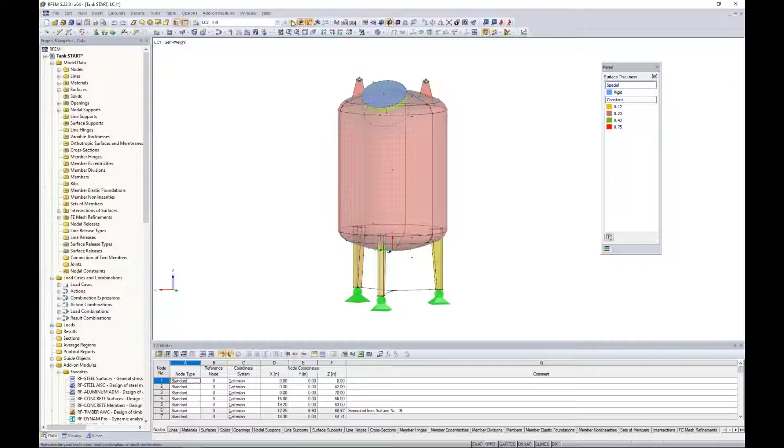We also had applied the loads to the structure, and we can see that within our drop-down box here are our different load cases. We have self-weight, which I don't have any visible loads displayed here because I didn't apply anything to the dead load other than accounting for the self-weight. Load case 2 here is the fill load, and this fill load was just an interior surface load within the inside of the tank.

We also have a wind load, so we can see the windward direction here from the global x-axis. We have a suction force on the leeward side. We also have a compression force coming up from underneath the tank, and we have a tension force up at the top here. Now we also put together all of our load combinations per the ASCE 7.

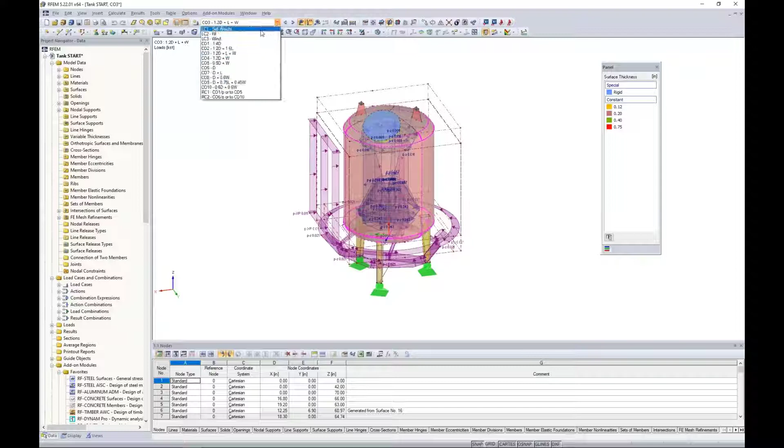So as we scroll through these, we can see all 3 of those different load cases acting together on the structure. So starting where we ended from webinar 1, we'd want to run a calculation, and we can go to calculate all. And for the sake of time, I've already went ahead and done so. So what we would be presented once we run the calculation is our results.

Within the project navigator, we should now have this 4th tab available to us called results. I think it's helpful if we just collapse most of these trees here, just to slowly go through all of the visible options, and we'll start off with the global deformations.

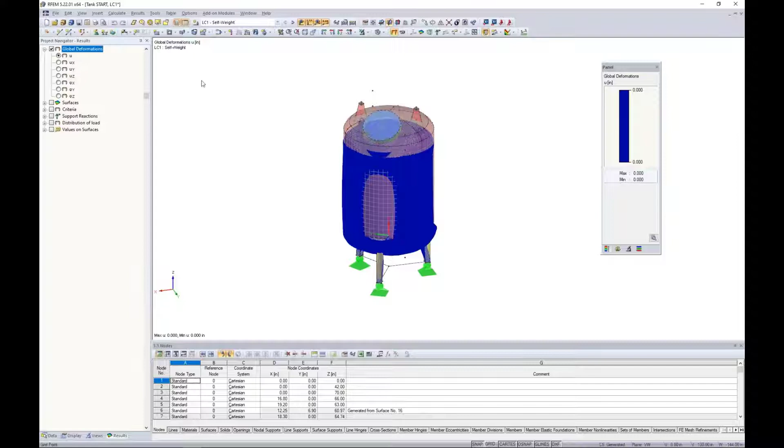So as I'm scrolling through these different load cases and load combinations, and I can go ahead and turn off my loads as well, I'll see the general deflection of the structure. This might be helpful in understanding the behavior under the applied loads. If we see something kind of flying off the page here, then we would understand that maybe we didn't correctly model something, or maybe our loads were incorrectly applied. So it just gives us a sense here if everything is going well.

What else might be important is to jump back to my fill load. Remember from webinar 1, when I double click on this fill load, we have it increasing linear in the Z direction. At the top of the tank, I want this fill load to be 0, but as we slowly increase the depth, we eventually reach a magnitude of 0.4 kips per square foot, which makes sense since the bottom of the tank sees a higher fill load than the top.

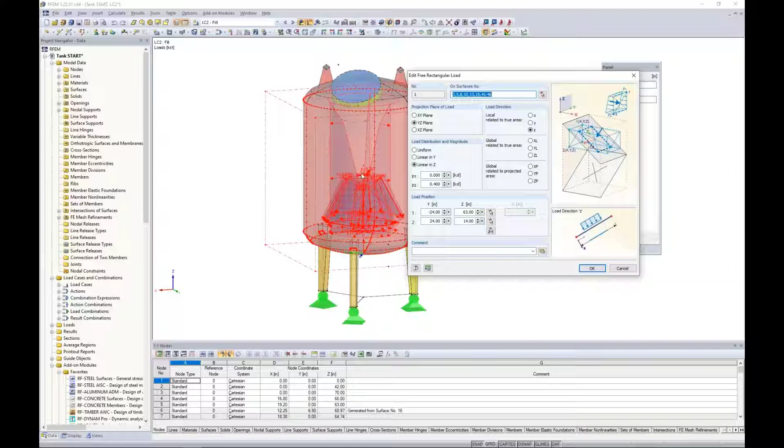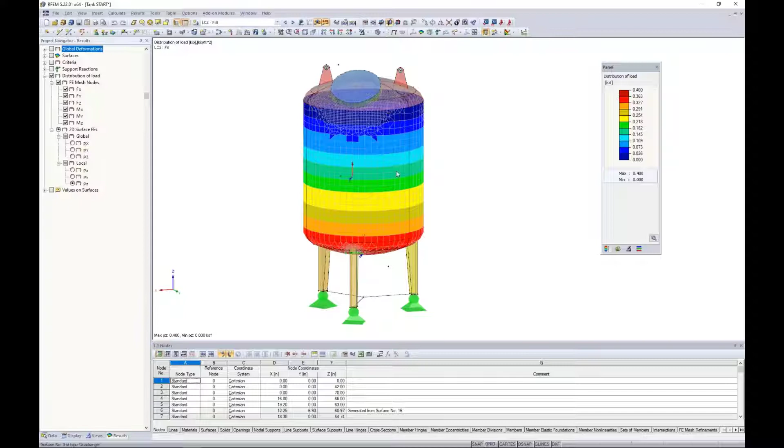So with this particular load case, after running results, I can turn off the global deformations and instead take a look at the distribution of load. When I view the distribution of load in the local Z direction, we can see how this load was distributed on the FE elements.

At the top, we have this blue color, indicating 0 kips per square foot, which is exactly what I defined with that surface load. But at the bottom of the structure, we have red contours equal to 0.4 kips per square foot. So just a nice validation that we correctly applied that fill load.

In a similar sense, we can take a look at the wind load. If I display this load again, we have it acting in the global X direction. Looking at the distribution of the load with these contours, I should see my highest compression force on this windward side, which relates to the negative value here. And in the back, we have this suction or tension force, denoted by this yellow positive value at about 0.01 kips per square foot.

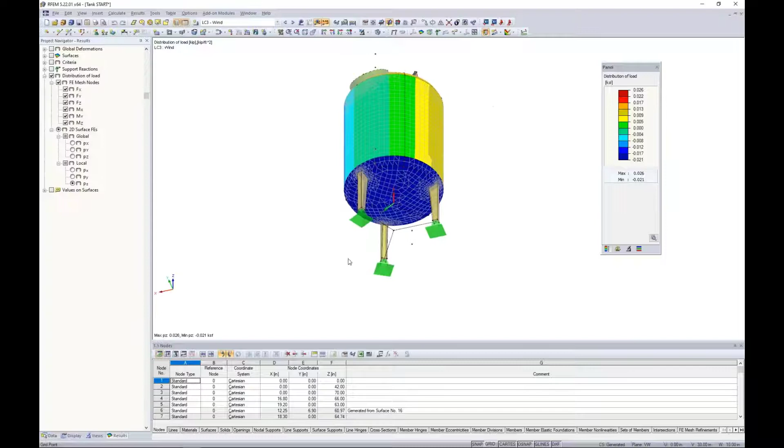At the sides, I should see essentially 0 because the wind is passing right over each of the side surfaces, denoted by the green color. At the bottom, this shows the correct compression forces, and at the top we have suction forces denoted by red with a positive 0.026. So again, just a nice validation to ensure we've applied our loads correctly.

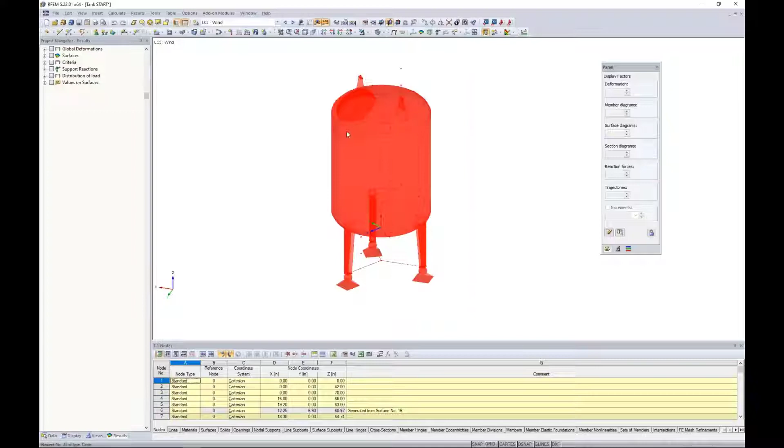We can also take a look at the entire structure by selecting it with my selection box. I can right click and view the center of gravity and info. The program throws up a warning that some elements have 0 density and won't be included in the center of gravity. We know this because in webinar 1 we created different intersections with our surfaces and deactivated components, and we also have our rigid component for the top of the manhole that we wouldn't necessarily want to consider for density.

But this will give us the information of the center of gravity, and we can also create a new node. It's difficult to see, but there's a red arrow pointing to the center of gravity. More importantly, we can get information such as the surface area and the coating of the surfaces.

Why would the coating be important? Well, if we wanted to layer some type of coating on this tank structure, or paint, we actually have the area in inches squared of how much paint might be required. We have the volume of the material as well as the weight of the material, so just a general summary of all the surfaces we've modeled.

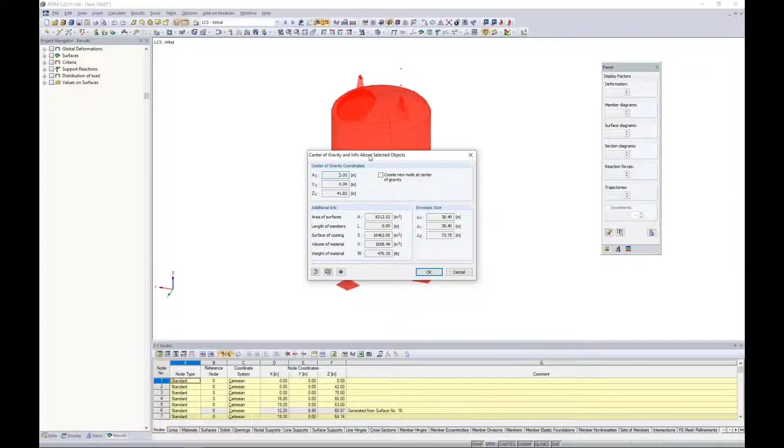In a similar sense, I can take a look at my tables, jumping to my results in table 4, where I can view my results summary. What might be interesting is to jump down to load case 2, our fill load again. We can view the sum of the loads in the Z direction, and you can see it's set at negative 3.03 kips. This is the total load from that interior fill load I applied.

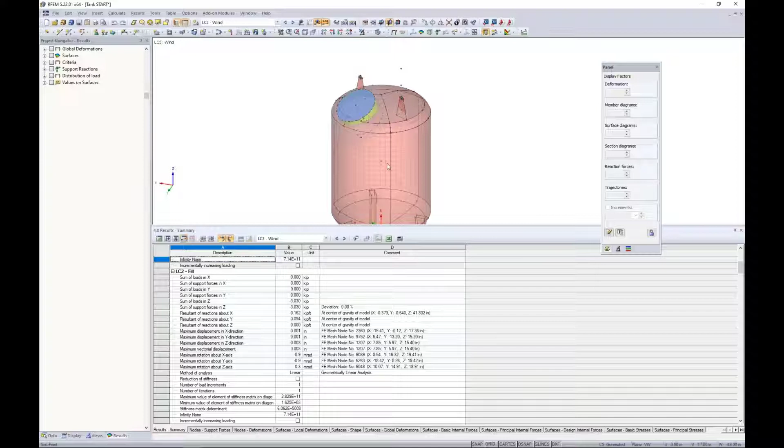We would expect our support reactions to match this sum of loads. So when I activate the support reactions in my project navigator, I turn on the global, making sure I'm under the fill load. We turn on the global Z components, and sure enough, we have 3 reactions in the vertical Z direction at 1.01, which add up to the sum of loads for LC2, the fill load, at negative 3.03. So again, just checking here that everything matches up quite well.

Now we can really move on to the results of our surfaces. With this, I can expand my tree here for my surfaces, and maybe we jump to one of these different load combinations here to view our results.

Now, what we have visible to us here is local deformations. These are based on the lowercase x, y, and z axes, related to the individual axes here of each surface rather than our global axes.

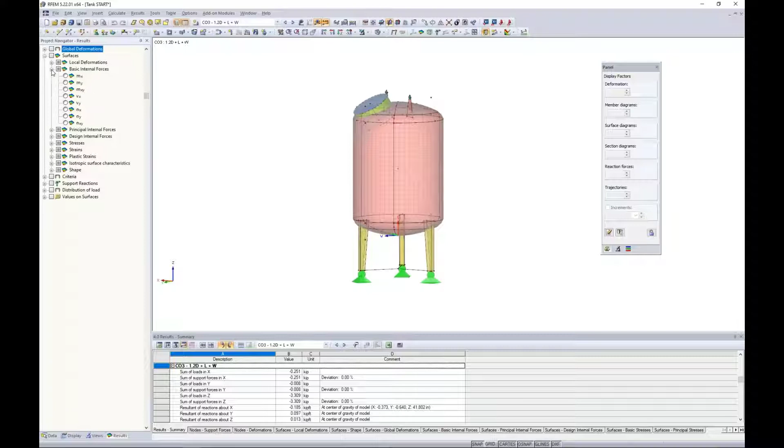But we can also view the basic internal forces. What I'll do here is activate a single surface and change the visibility by the selected objects, and zoom in. Let me also right click to turn on the local axes of this surface element. So we're currently viewing the bending MX. We also have MY. We can view the shear forces as well as the axial forces, NX, NY, and NXY.

One thing to note here that is unique for surfaces is that MX is not bending about the local axes, it's along the local axes. This is contrary to our belief for 1D members that MX would be bending about the local x-axis. So surfaces or plate elements have a different convention here.

One thing that I think is helpful to understand how these internal forces are calculated, or the convention related to these local axes, is under the help manual. We can take a look at the manual in PDF format for RFEM, or we can also access the online manual on our website. If you go to dlubal.com, you'll also find under downloads and info, online manuals. I'm currently looking at the RFEM online manual, chapter 8 for results.

If we scroll down here to section 8.15 for basic internal forces, the reason why I wanted to point this out is because it shows a nice picture here of the internal forces in relationship to the local X, Y, and Z axes. Again, we can see something like MX is bending along the X axes, MY is bending along the Y axes. We also see these axial forces, shear forces all shown here. So this just gives us a little bit better view of how exactly those forces relate to the local axes.

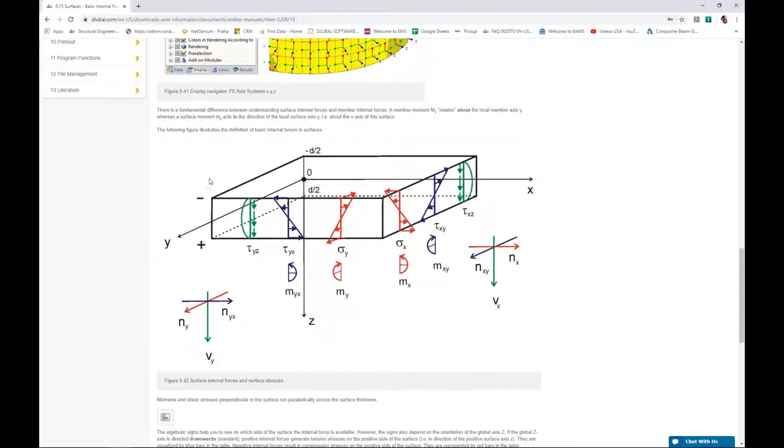Now keep in mind too that for all of these internal forces, this is true for stresses as well. The equations are directly within the help manual, so if we're curious to know exactly how these internal forces are calculated, again, refer to the manual.

So going back to RFEM then, that will essentially sum up the internal forces. But you'll notice that the next option, if I expand the tree here, is principal internal forces. This is showing me M1, M2, we have N1 and N2. So what exactly is the difference here between the basic internal forces versus the principal internal forces? The basic is really internal forces relative to the freely defined X, Y, and Z local axes, as we already discussed.

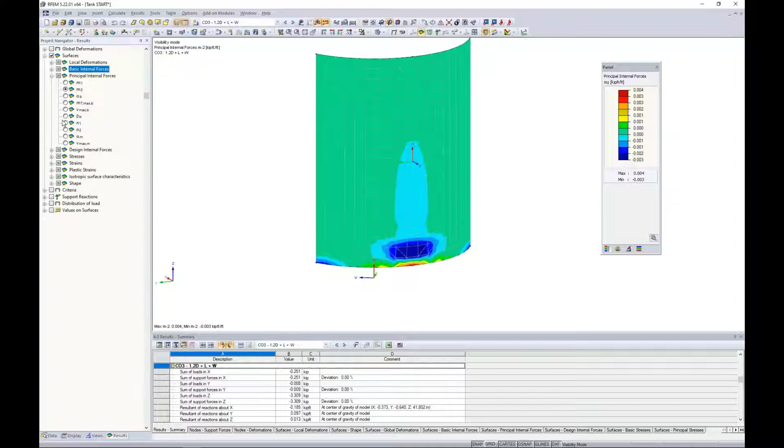Well, for the principal, we will represent the extreme values of the internal forces. Essentially, we'll take the basic internal forces that we just saw and transform them in the principal axis direction. So principal axis 1 will be the maximum value, which we can see here as M1. Then we have axis 2, which is the minimum value. We also can display this alpha factor here, and the alpha is going to be the angle between the local x or the y axes and the principal axes 1 or 2. And we need to increase the trajectory factor here.

So I do so quite a bit, and then we can see down at the bottom, those trajectories are visible to us. Again, that's going to give us the angle between our local x-axis and our principal axes. Now, in some scenarios with a completely straight, flat surface, maybe there is no difference between basic internal forces and principal.

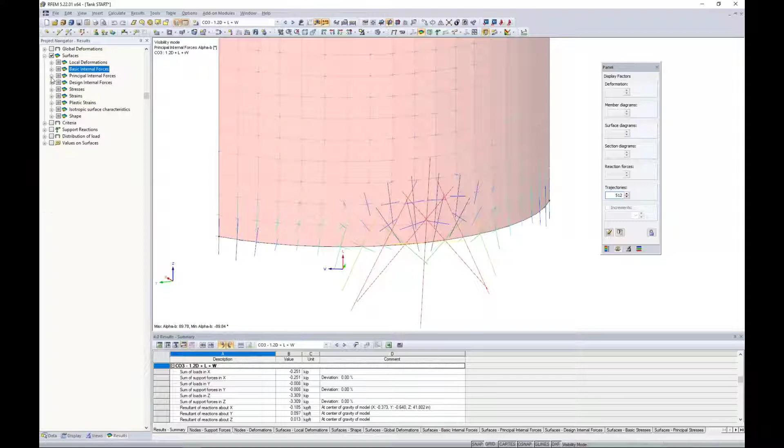Looking at the design internal forces, this is really more relevant to concrete design. We're going to give you the positive and negative bending internal forces for the top of the surface versus the bottom of the surface. So you can imagine how that's beneficial for concrete design. This might be used if we weren't utilizing the add-on module within RFEM, but rather we wanted to take these internal forces into our own in-house tools or spreadsheets to do design. Now, today we have steel surfaces, so this really isn't of much interest to us.

Now we have the stresses listed here. These are only available within RFEM when you've purchased the RF Steel add-on module. RF Steel, which we'll get into in a minute, releases these stresses within the main program. So if you did not purchase that add-on module, you would not see the stresses available here. This is true for all materials, even timber stresses, for example. You would need to purchase the RF Steel add-on module, which sounds a little counterintuitive, but essentially that's what releases these stresses we're currently viewing.

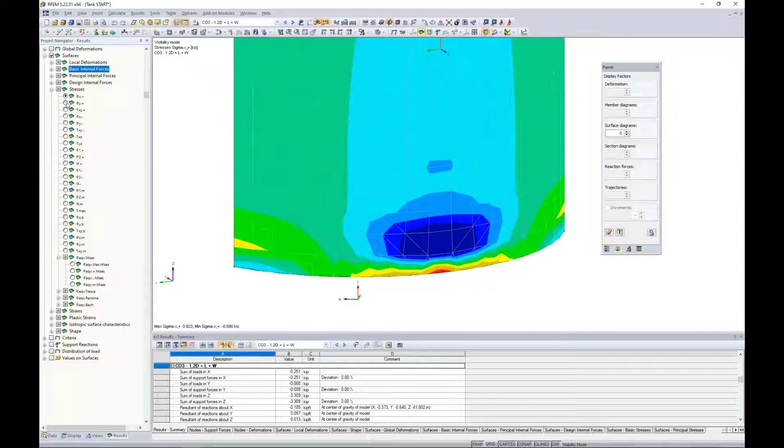So we can view the normal stresses in the X and Y direction, shear stresses, but we also have the principal normal stresses and principal shear stresses as well, based on those principal axes we just discussed.

A little further down, you can see our equivalent stresses, and these are based on 4 different hypotheses. So you can see here we have von Mises, Tresca, Rankine, and the Bach theory. Quite common would probably be to refer to von Mises for design.

We also can close down these stresses and view the strains in a similar manner. So we have our strains based on the local XY axes, principal strains, and then of course equivalent strains as well, which again are based on those 4 different hypotheses shown here, which maybe von Mises is most relevant to our design.

Jumping back to one of the basic internal forces here, it doesn't really matter which one. I'm going to cancel out this visibility. I thought it would be a nice feature here, and if I turn off the local axes of the entire structure, what we can do to view the interior stresses of this enclosed tank is take advantage of our clipping plane.

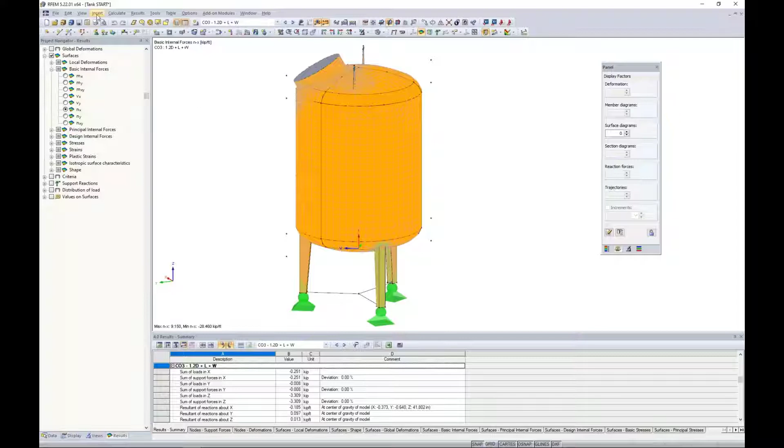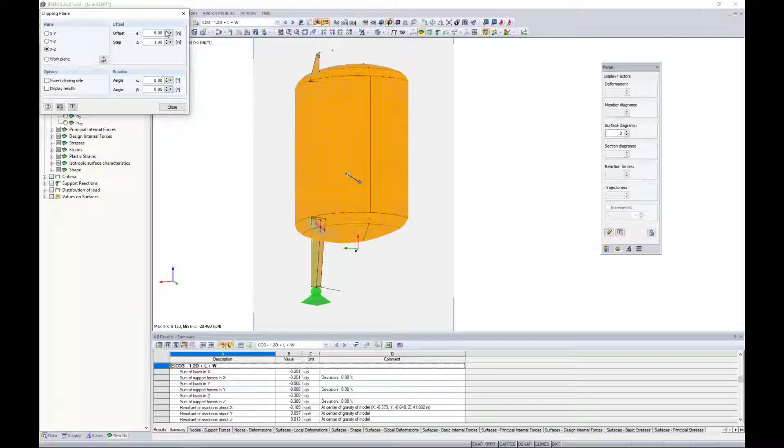So under Insert, we have clipping plane. What this will do is essentially slice through our tank here so we can see the interior stresses. We can set a step distance of 1 inch, for example, and then use our offset button to click around within our structure, which will cut through that structure with the clipping plane. We can also change the planes we're viewing.

We can even change the rotation, so we can change this to 25 degrees, for example. Now we're viewing this clipping at an angle. Obviously the clipping plane may be an advantage when looking at these enclosed type structures such as tank elements. Where it's an even bigger advantage, as you can imagine, is with 3D solid elements, where we truly can't visualize the stresses on the interior of the solid element. Clipping planes can become very useful there.

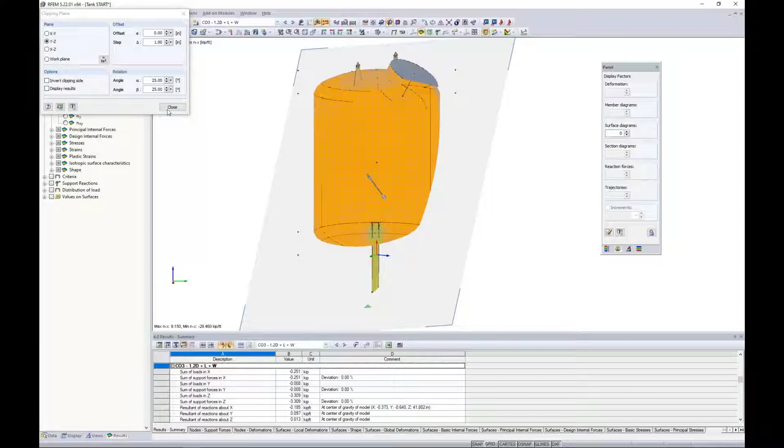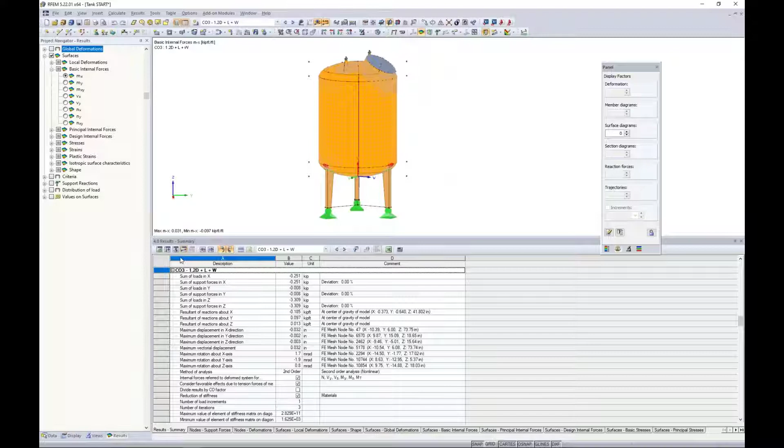So currently we're looking at everything graphically, but I wanted to point out that all of this information we're seeing visually is also available in table format. We can view this again under table 4.0 results. Perhaps we jump to the surfaces for the basic internal forces.

There's a couple things I want to point out here. We're currently viewing each surface, and you can see the program kind of syncs up in the background which surface we're looking at. But if we jump down to surface number 5, you'll notice only a single point is given to me here with internal force values. So why is that? I'm going to create visibility by the selected objects to take a look at surface number 5, and you'll see that single point given to me right here in the center.

This is a problem. Obviously we're much more interested in the internal forces going on around this entire surface. So why is there only one value given? Well, that's because the results are based on grid points.

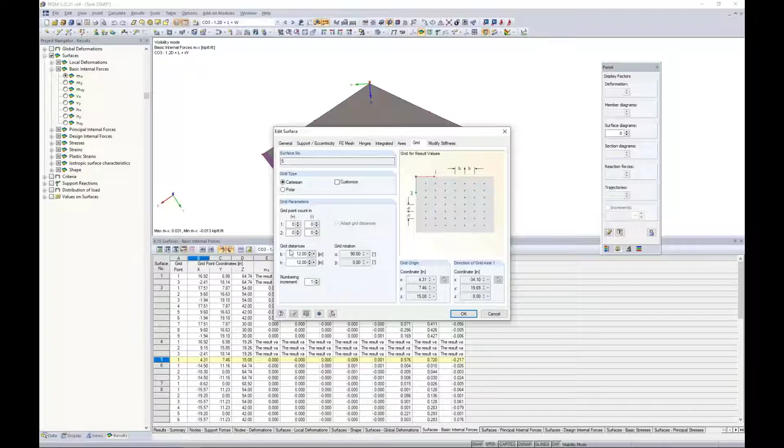If I double click this surface to edit it, we have a tab here called Grid. By default, the grid spacing is set at every 1 foot. Well, this is entirely too big for our model today. Now this tank structure is fairly small, so we need to go back—in webinar 1, we did this with the FE elements—and we want to do the same with these grid spacings, changing this to maybe something like 0.5 inch spacing. And I click OK.

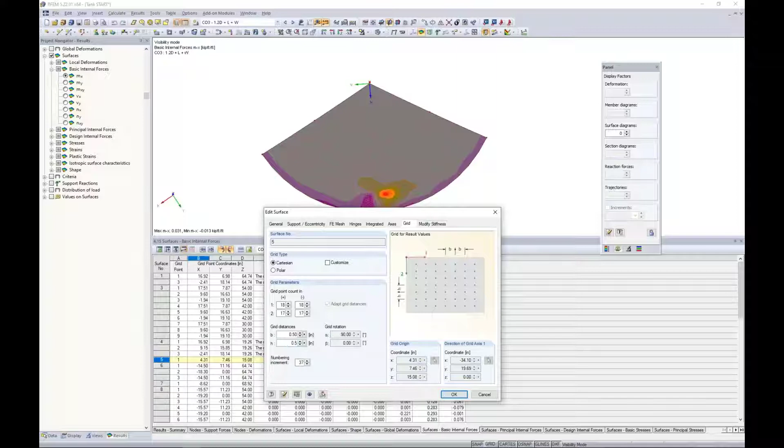So now you'll notice with surface number 5, I have many more points available to me here. This is obviously going to be much more beneficial than just a single point element. Now the question might be, well, is the analysis incorrect without changing those grid points? And the answer is no, the analysis stays the same. You'll notice we didn't have to rerun it. Everything we're viewing visually here is based on the FE mesh element points. If I turn off my results here, turn off my loads, these FE mesh points are producing the results, and then we can graphically see this with the nice contours.

When it comes to the table, we're not presenting results based on every FE mesh point. You can see it's kind of all over the place - there's really no nice pattern to the FE mesh. So that's why we're presenting it to you in grid points, so that every 0.5 inch spacing we're getting a result.

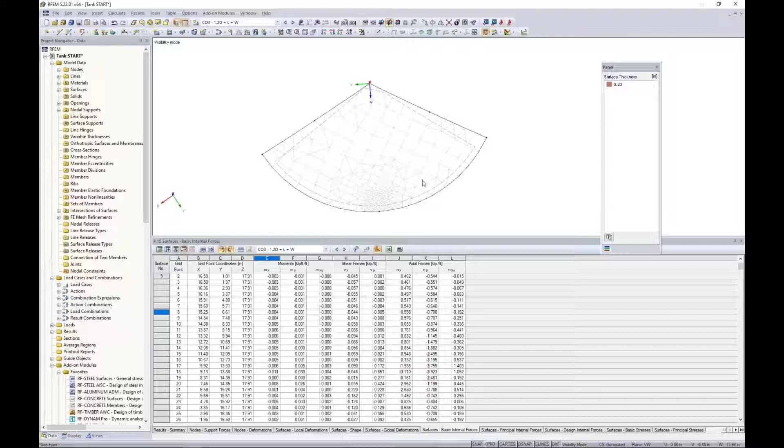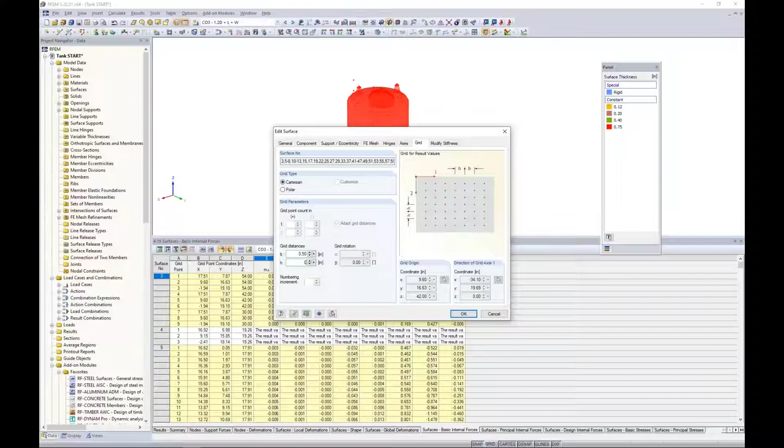Which makes a little bit more sense than necessarily displaying every FE mesh point. So what we'd need to do here is cancel our visibility mode, zoom out to the entire structure, and select all surfaces. We can double click on them. Under the Grid tab, we can change the grid spacing of all surfaces at once to 0.5 feet, and click OK. Now we're going to see much better results within our table.

Now keep in mind for these table results, we can export this single table automatically to Microsoft Excel. I can simply click this button here, and the program will take this current table I'm looking at and export it over to a Microsoft Excel spreadsheet.

If we wanted to export multiple tables at once, maybe for multiple load combinations or load cases, that's possible by going to File, Export. Here we have an XLS format. When I click OK to export to Microsoft Excel, this gives me quite a few more options.

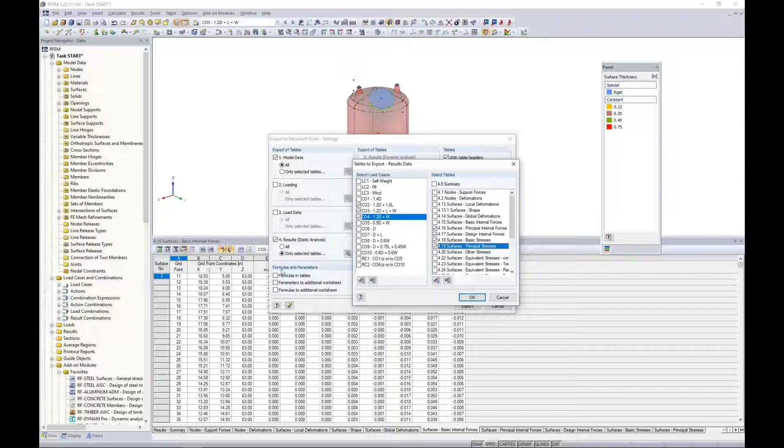You'll notice here I can activate my results, for example, and take a look at these detail settings for the selected tables. I can turn on several load combinations or all of them, and select different tables to export. So you can imagine this is quite a bit more efficient in terms of exporting rather than every single table, as I previously showed you. But if you're just looking for a quick export to further sort or filter data, that's possible here too.

Okay, so that really just gives an overall summary of the analysis results within RFEM.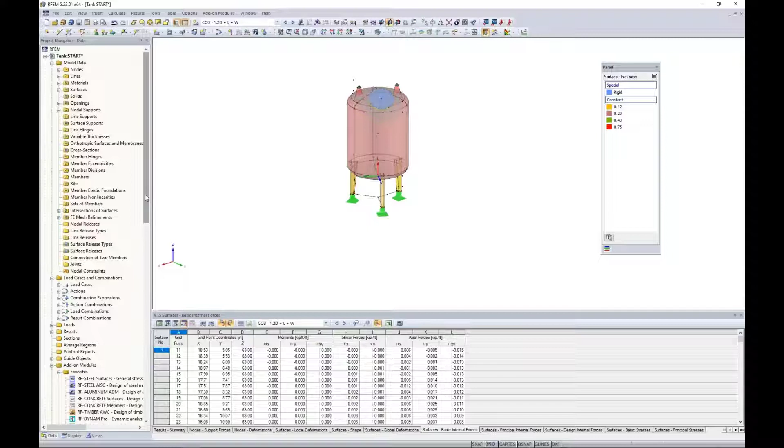What I'd like to cover now is the general stress design of these surfaces utilizing our add-on module RF Steel. I already mentioned that RF Steel releases the stresses within the RFEM analysis, but it can also be used to do a general stress design.

So we can access the add-on modules, as I pointed out in Webinar 1, under our Project Navigator. Here's our long list of add-on modules - RF Steel Surfaces is at the top because I've right-clicked and activated it as one of my favorites to jump it up here. We also can access all the add-on modules from our drop-down box up at the top under Design for Steel, and you'll see RF Steel Surfaces.

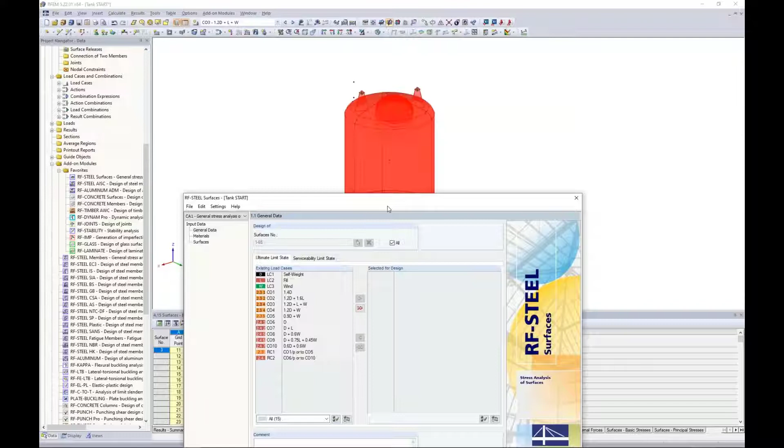So with this add-on module, as I always like to mention, it's just a simple dialog box that pops up within the main program RFEM. I don't need to remodel the structure, I don't need to redefine loads - even all of those internal forces and stresses have already been solved for. So all of that information is coming into this add-on module. We're just specifying a little bit more information specific to the general stress design.

Now keep in mind also that this is completely code independent, so we're not designing per any particular code. We're just comparing the stresses from the analysis to the limiting stresses based on the material.

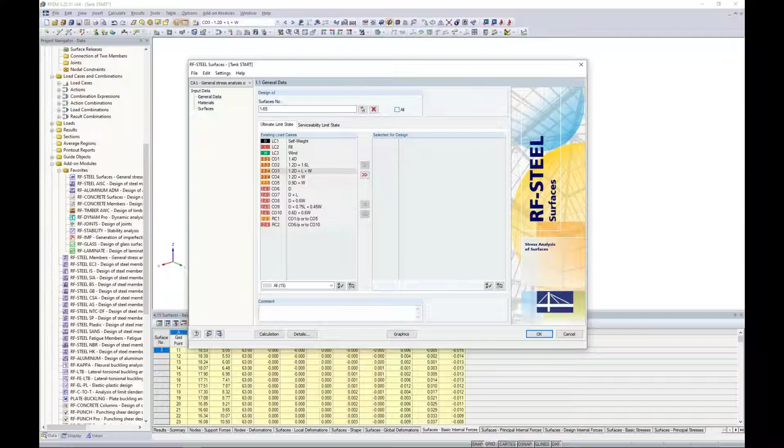By default, the program selects all surfaces to be designed, but I don't want that today - rather I'm going to graphically select which surfaces. Under the Display tab, under the Views tab, is where I'm going to activate my surfaces by thickness. I'm going to choose my surfaces that are 0.2 inches thick as well as 0.12 inches thick. This will highlight only in the graphical view the body of the tank as well as the legs - these are the only surfaces I'm interested in designing at the moment. You'll notice everything else is hidden, including the components on our roof.

When I click OK, all of those surfaces are individually listed out here. For the ultimate limit state, I want to move my LRFD load combinations over to the right-hand side to be considered for design. Additionally, I could select the result combination to be moved over, or I could just design the result combination itself.

If we remember from Webinar 1, result combinations are going to be an envelope solution. So I have RC1 here, which would be the envelope solution for all my LRFD load combinations, showing me the max and mins. I prefer to list out the load combinations individually because then I can see my max and mins from each individual load combination, but either are possible.

The serviceability limit state is to check deflections. For my tank example today, I'm not so concerned with checking deflections, but if we were designing some type of floor element or industrial structure sensitive to machinery, where deflections are truly a concern, this is where we'd want to move our ASD load combinations over to the right-hand side for serviceability. We'll leave those blank for now and move back to the ultimate limit state, continuing down our list.

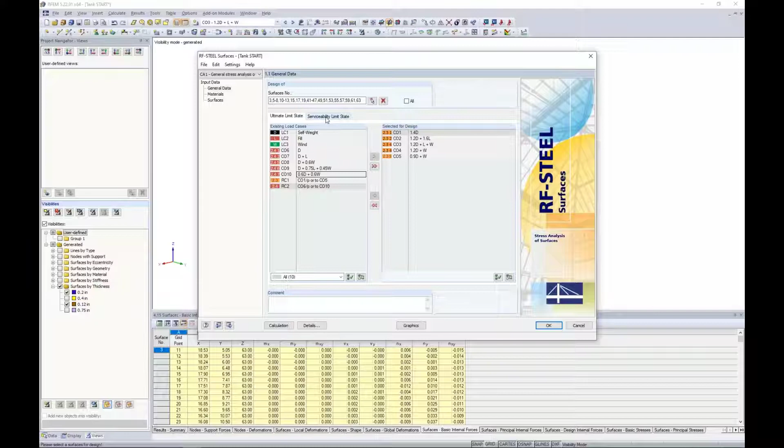The materials are automatically brought in from RFEM. We have our stainless steel material, and the yield strength is given as 30 KSI, with the limiting stresses automatically filled out here. We can see the limiting normal stresses as well as shear stresses. These are the values the program compares to my analysis stresses to give an overall design ratio. You can also choose to manually override these - the program automatically sets them based on yield strength, but you can click this manually button to override those. We won't be doing that today.

What else we can do under these edit material settings is set a few different ranges based on material thickness. Perhaps for a thicker surface, we might have a higher yield strength. We can set those ranges for thickness here, as well as the equivalent yield strength, and the program will consider that for the design of our surface. Today that's not so important because we have only uniform thicknesses for our surface elements, but that is one option to consider.

Also within RF steel, this isn't specific to only steel materials. For example, if you wanted to do a general stress design for aluminum, you could bring an aluminum material in here. You would need to modify the limiting stresses manually, but then we could also do a general stress design for aluminum surfaces as well. So it is not only limited to just steel.

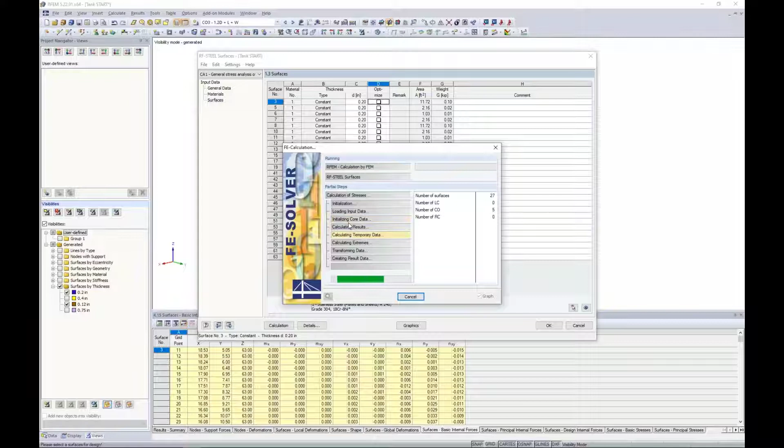When I run the calculation, we'll see that it solves pretty quick because we already have all of our stresses from RFEM and the analysis for LRFD load combinations. We're just bringing them into this add-on module and comparing to the limiting stresses based on the material.

We now have our results tables available to us, and we can view the stresses by load case, by material, or by surface. When I pull this down, we can see that everything is synced up in the background. We have the red arrow pointing to where the controlling internal force is, as well as the surface highlighted that we're currently looking at.

Here's the column for existing stresses, all listed out. Here's my limiting stresses based purely on the material. And from this information, we get the general stress design ratio. Now there are only a handful of stresses listed out here.

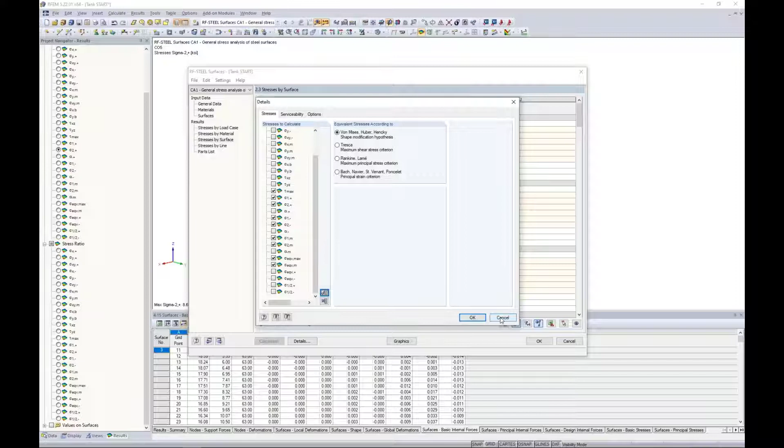Under the Details tab, this is where you can control what stresses are turned on or off and used for this design. By default, we have already selected a handful of stresses available. We don't want to check all of them - that's completely overwhelming and may not be necessary for the design. But if you're interested in turning on or off some different stresses, you can do so under this Details tab. For the most part, most of these stress design ratios look okay.

When I take a look at the filter options here to filter to the max design ratios, and view the summary down at the bottom, I have a max check of 1.4, which is greater than 1.0.

So I'm shown here my red sad face. This is obviously something that we need to address. We're over that yield strength. So how can we do so?

Well, let's take a look at graphically what's going on rather than just in our tables. So I'm going to click here to my equivalent von Mises stresses. You'll notice it's for load combination 3, and I can click on my graphics. Well, most of the tank here, when we look at our von Mises stresses, keep in mind we're still within this add-on module RF-Steel, we just view the stresses or the stress design ratios graphically.

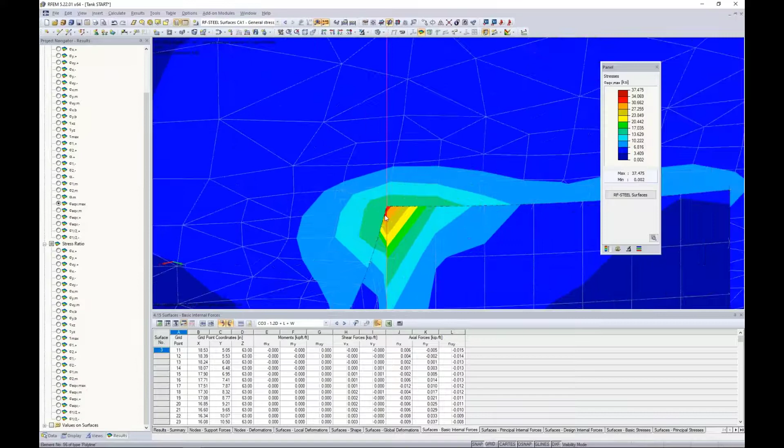When I scroll in here, we just have these teeny tiny points that are really causing the issue, and everything else looks completely fine. So this is what we would call a singularity.

Singularity is not unique to RFEM. It can happen in any finite element analysis software. It's really a point, an FE mesh point, where we just have a very high stress concentration and we're not getting great load distribution.

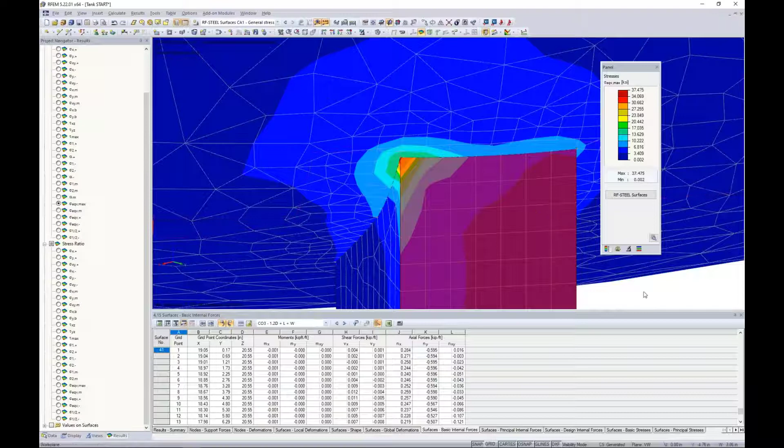And we know in reality where this tank body is connecting to the tank legs that we're going to get much better load distribution all along this length than what the program is showing me. So how can we better tell the program that the load distribution is there, that these high stress or high peak points are causing the over-design of my general stresses to be much too high?

Well, let me jump to load combination 3 here, because we have determined that that's the controlling load combination, and I'm going to turn on my von Mises stresses. So this is exactly what we were looking at within the add-on module itself.

Under the display tab, this is typically what would be available. I know it looks a little overwhelming, but again, we can collapse these trees, and eventually I want to focus on this results portion here. We also have these surfaces, which I can expand under the results, and the distribution of internal forces and stresses.

You'll notice here that we have several options for how we display these stresses. The third option is default here, but I want to focus on the first 4 options and what exactly they mean within the program. For this, I'll jump to the PowerPoint.

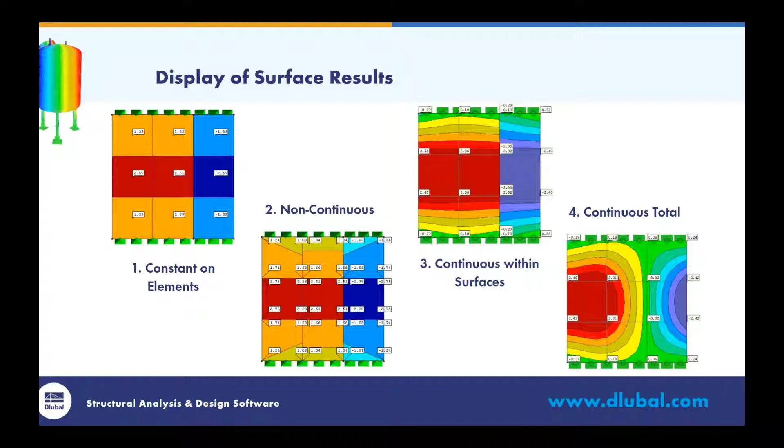So again, number 3 is typically fine, that's why it's default, but there are scenarios, especially when we're looking at a much more local scale here of where these small little elements are connecting in every FE mesh point, that we want to change this to actually constant on elements.

So going back to the RFEM model, you'll notice here that when I have this as default, continuous within surfaces, my von Mises stress is set at 37 KSI. When I change this to constant on elements, now notice that each FE element has its own color, and the stress drops significantly from 37 KSI clear down to 16 KSI. That's a huge difference. This doesn't relate to what's right versus what's wrong with the analysis itself—it's purely how we're viewing our results graphically here. Just by changing this view, you can see how much those stresses are impacted.

Now, when I go back to the add-on module RF Steel, let's go ahead and launch this add-on module. I want to point out that I changed my display, as we saw back in RFEM. But when I'm looking at the total stress design ratios here, they're still showing 1.4, which we know our highest equivalent von Mises stress, for example, is only 16, so we should be well below this.

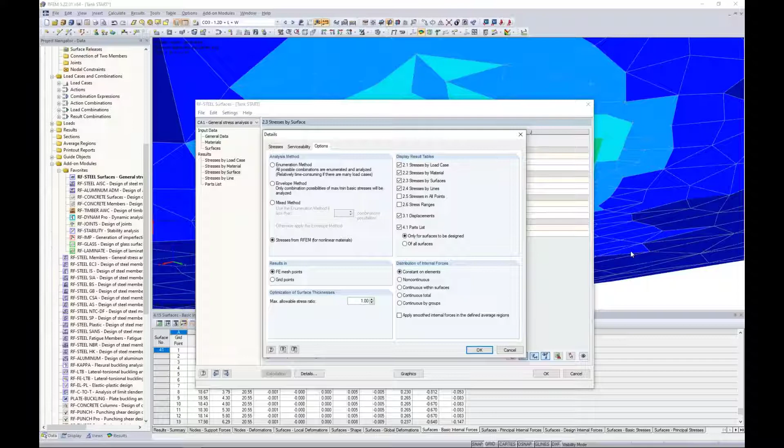Well, the reason why is under details, we need to set this under the options as well. We would change the distribution of internal forces to constant on elements. So although we've changed it back in RFEM, the add-on module has its own separate option here that we want to change. When I click OK, the program says it needs to recalculate the results. So we go ahead and let it bring in those internal forces again, and it compares them to the limiting design stresses. Sure enough, you can see my max design ratio is now 0.62.

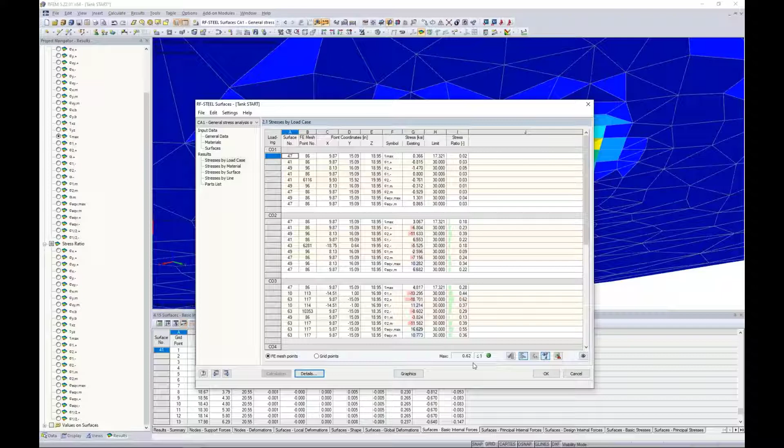So just by changing the view of our results, we can really significantly impact the overstress design ratios within the add-on module. Now, with that said, if we take a look here at stresses by surface—let's take a look at the von Mises stresses, for example—and I jump to my graphics view again.

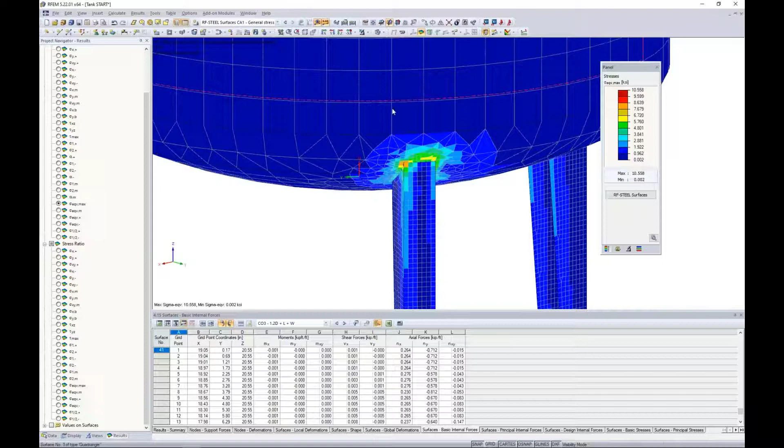I'd still like to point out, though, we took care of this high design stress ratio. We're definitely sitting much better, but I'd still argue that there's a singularity still occurring at this location. If you look at the rest of the structure, the stresses are so low, but when we look at these FE mesh points, they're still relatively high. So I want to take this a step further to address these singularities by applying what's called an average region.

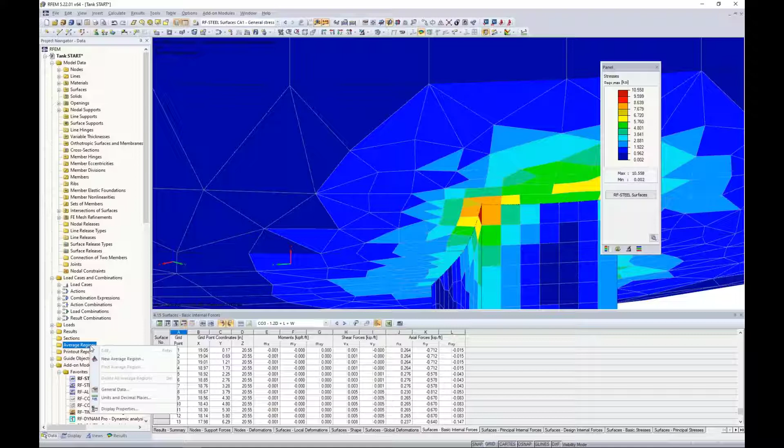So under the Data tab, what I can do is access a new average region by right-clicking on it. We launch the dialog box, new average region, and it's exactly as it sounds—we're going to average out the internal forces over a particular region. This is quite powerful because I can select multiple surfaces here to be considered. So we'll select the tank body, and maybe I also select these two surfaces from my tank leg. I click OK.

So we need to define the average region as a circle, as well as the dimensions, and I'll set this at 2 inches. Now, the question we may get is, how big should we set the average region? This really depends on your project, and it's up to the engineer's discretion. We're working with a very small tank here, so 2 inches is adequate to apply this smoothing region at this particular location. But you can imagine if we set this at something like 2 feet, that's entirely too big to average out the internal forces. But 2 feet might be perfectly fine when we're averaging out a concrete slab where we have a column framing in—so again, it really just depends on your project.

We want to tell the program where to place this average region, so graphically I can select this node here, and the coordinates are automatically populated. I'm going to choose all 4 checkboxes here—this averages out the internal forces in all directions, based on the local axes U and V of the average region versus the local axes X and Y of the surface. We need to specify a projection direction, and we have the global X, Y, and Z axes given to us here. But from RFEM Webinar 1, we remember that working with this circular tank structure, we're not so much able to relate the model to these global axes so easily.

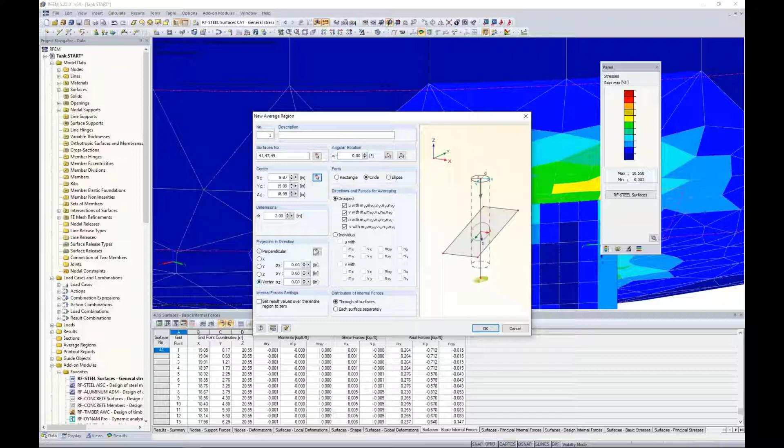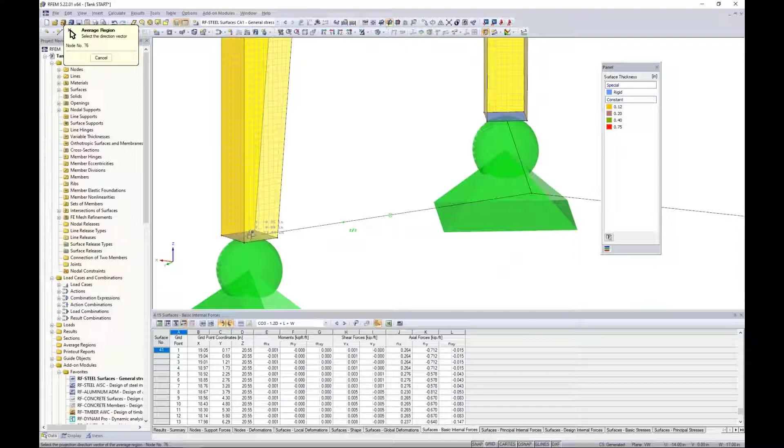Instead, what I can do is choose my own direction vector to average out these forces. When I choose this option, it allows me to graphically select a couple points. I'll zoom out here, turn off my results, and cancel my visibility mode. We remember from the first webinar we created all of these points, and zooming into the bottom of my leg, I'm going to choose the center point here. My second point is going to be the center of the tank structure as a whole.

Now this projection direction was automatically calculated, and you can see the parameter set here. We want to distribute the internal forces through all surfaces. When I click OK, it might be better to turn this to a wireframe view. We have an average region defined here. It's a little difficult to see, but you can see that we've applied this 2-inch average region, and it's being projected towards the center of the tank structure.

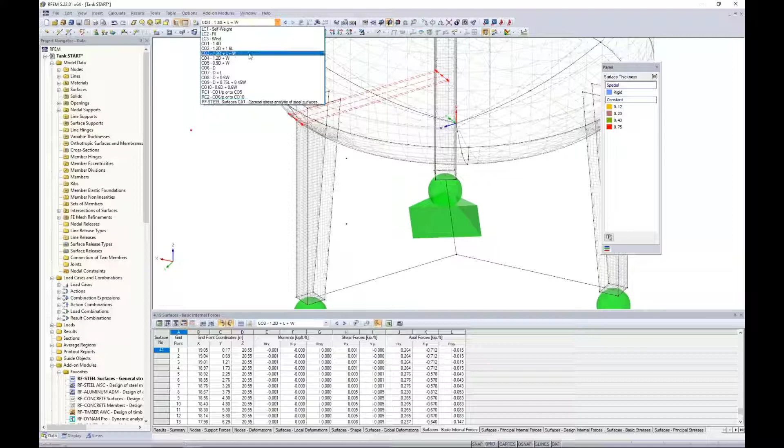When I apply this average region, I'm going to view my results for load combination 3, and we can turn these on. I'm going to maneuver my model here and zoom into this point. I'm currently viewing my von Mises stresses, and notice that we no longer have these high peak forces here. We're instead averaging out over this 2-inch diameter region for those von Mises stresses.

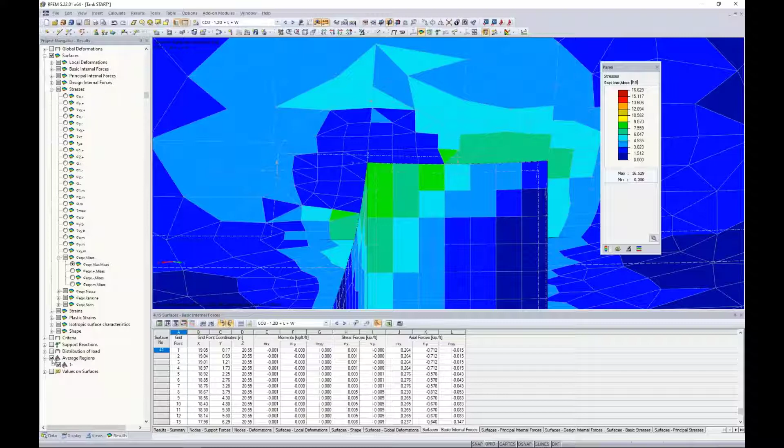Now, when you apply average regions, you have a new checkbox here in your results where you can turn on and off the average region. So if I turn it off, well, here we go - there's those high stresses visible to us. We can activate the average region again, and they completely disappear.

So we'd want to continue adding these average regions to other locations where the legs are framing into the tank body, just to alleviate those high peaks. For the sake of time, we won't be doing that today, but hopefully you have some insight on how to apply average regions for odd structures like this. Obviously, a flat surface would be much easier to apply an average region in terms of the projection direction and such.

Now back under the Data tab in RF Steel Surfaces, in a very similar manner that we saw previously with the display of internal forces, under the Details tab and the Options tab, we do need to apply the smoothed internal forces from the defined average regions. Otherwise, they will not be considered. So we just take that extra step within the add-on module to say yes, please consider them with the design.

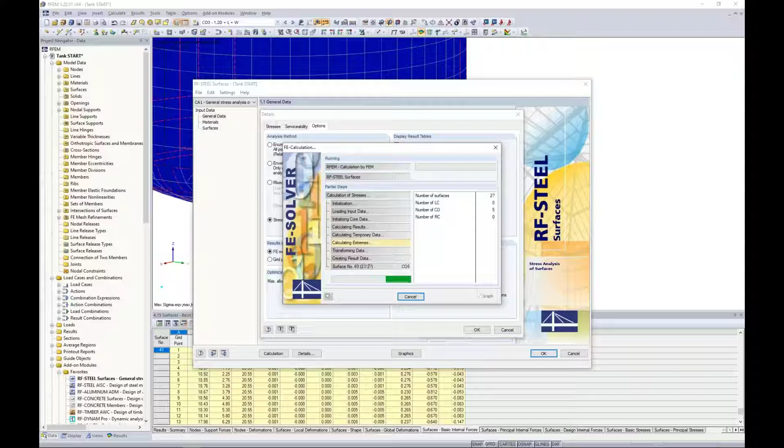The program will cycle through the quick analysis again, and we will be presented with our results. Now, I didn't apply the average regions to the other locations, so we're still seeing the same design ratio, but we would expect this to fall significantly, and then maybe we could optimize our tank thickness quite a bit further.

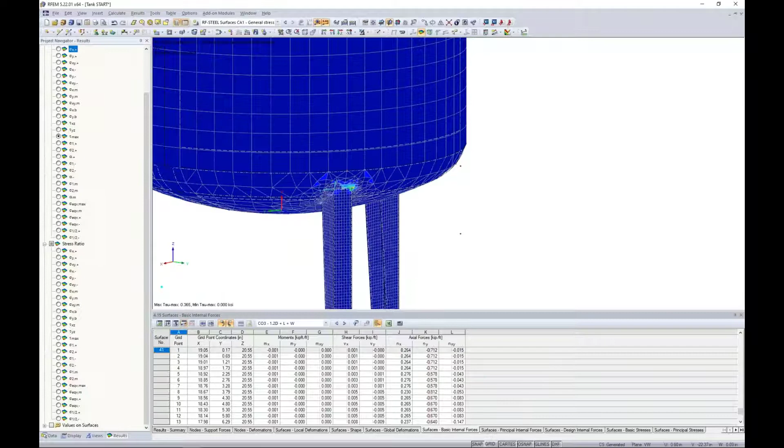All right, so that really explains a general stress design for these surface elements utilizing that add-on module. The next thing we would like to discuss is the stability design, and in particular, the buckling behavior of this structure, and we'll be relating that to imperfections.

So I'm going to launch RF Stability from my list of add-on modules here. And when I do so, the add-on module has a similar feel to what we saw with RF Steel Surfaces. Now it's a little bit different - this is going to allow us to run an eigenvalue analysis on the structure.

In previous webinars, I've used RF Stability to track down instabilities. We all know that instabilities can be incredibly frustrating within a finite element software, so RF Stability can be extremely helpful in tracking down where exactly we may have a problem. But today I'm going to be utilizing the add-on module to do a general buckling analysis to identify modes of failure for the structure under the applied loads.

The number of eigenvalues needs to be defined, and the default is 4, so we'll leave that as defined here. We want to import either a load case or a load combination. My worst case scenario has been load combination 3, and you certainly want to import either a load case or combination that has the highest axial forces. We know this is going to give the worst buckling failure modes, as opposed to importing something that's applying tension forces. For example, the program will throw up a warning that says it can't apply the eigenvalue analysis for buckling because we have tension forces. So something to keep in mind there.

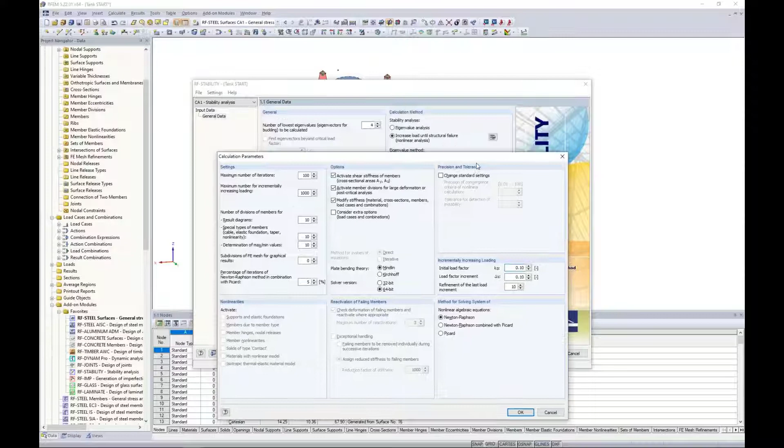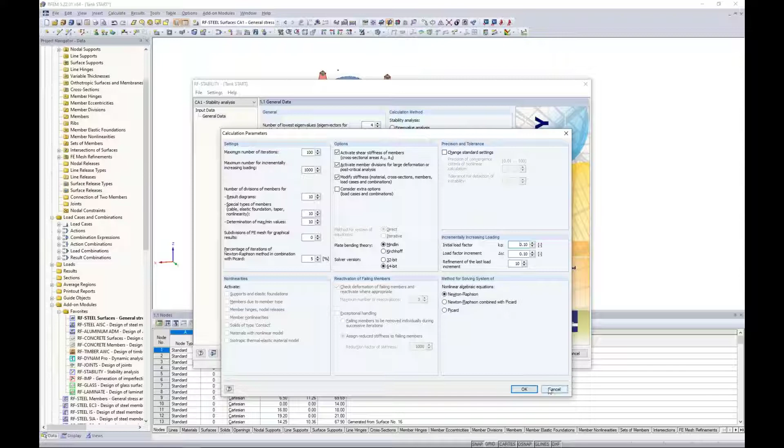We do have the second option here to run a nonlinear analysis, and this actually will consider any geometric or material nonlinearities back within the main model. We have the ability to incrementally increase the load. This whole section I'll get into a little bit later at the end of the webinar, because I think it's actually pretty powerful in what we can do with a nonlinear buckling analysis. But for my initial calculation here, I just want to run a linear analysis, get the basic buckling failure modes.

Now, when I click calculate, what the program's doing is running through these first 4 eigenvalues. You can run up to 100 eigenvalues if you want, but it really doesn't make much sense when we're looking at those higher eigenvalues, because the buckling mode failure will probably never occur. It's taking extremely high loads to even see that type of buckling mode. So that's why we set this at 4 eigenvalues, and this will give us the general failure modes within our structure today.

So once this is done solving, we will be presented our results here within table format, and we see here the first 4 eigenvalues given to us. We also can scroll through these, and you'll notice in the background the RFEM model is synced to what mode shape we're currently viewing, and it looks to be essentially buckling of this leg over on the right-hand side for the first 4 eigenvalues.

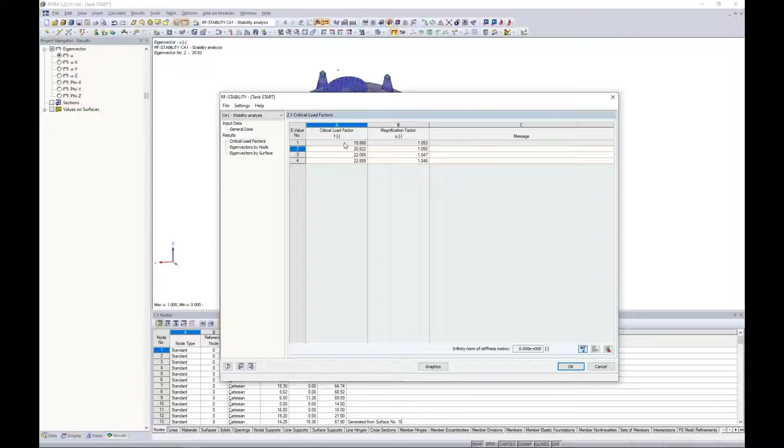And we're also presented with the critical load factors. These critical load factors are the values you can multiply load combination 3, that we imported before, by to see the failure buckling mode shown in the background here. So additional eigenvalues may not be so relevant when we're getting into some of those higher numbers. But of course, if we were solving for higher numbers, we might see buckling of the other 2 legs, or even buckling of the tank body itself. Something to play around with.

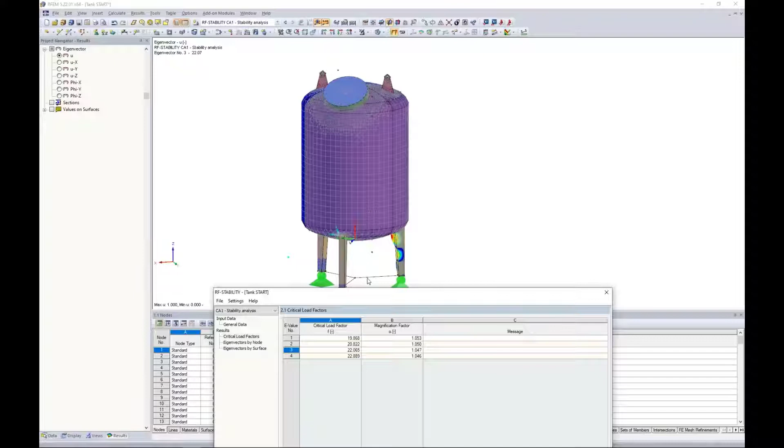Looking at the first eigenmode shape, we can jump to our graphics view. Once again, we are currently in the RF stability add-on module. I'm just viewing my results graphically here, and under this second option within my panel, we also can drop to the different eigenmode buckling failure modes here if we'd like. So everything has to do again with this leg over on the right hand side.

So the eigenmode is shown to us here, and I can actually right click on the boundary line element of my leg surface here. When I right click on it, I can choose results diagram. What this will bring up is the buckling mode shape here in kind of a results diagram format. And let me turn on the Y direction here so we can see the buckling behavior of that leg element along that line.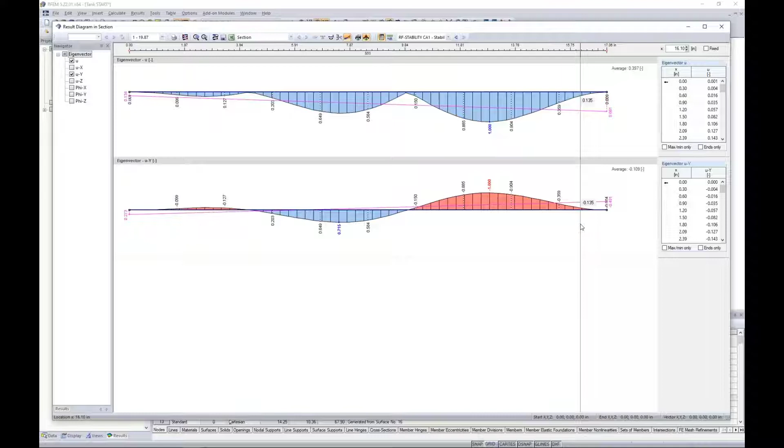Now, the reason I'm doing this whole procedure is because I want to relate this buckling to modeling imperfections. We all know that when we are constructing a tank or any type of structure, there are installation errors, maybe incorrect construction methods, or we don't properly manufacture the elements, and inevitably we have imperfections. And everything that we are modeling within the RFEM program here is perfect, essentially.

This is true for any general finite element analysis. All lines are perfectly straight. All elements join together at every FE mesh point, when we know that in reality, lines probably won't be straight. Surfaces aren't in all one plane. You know, mistakes happen, and there are tolerances that are given though for these mistakes.

And this comes from the AISC Code of Standard Practice, and in particular, Section 7.13.1. It discusses misalignment of members and surfaces and such. And these tolerances can be less than L over 500, where L is the distance between working points.

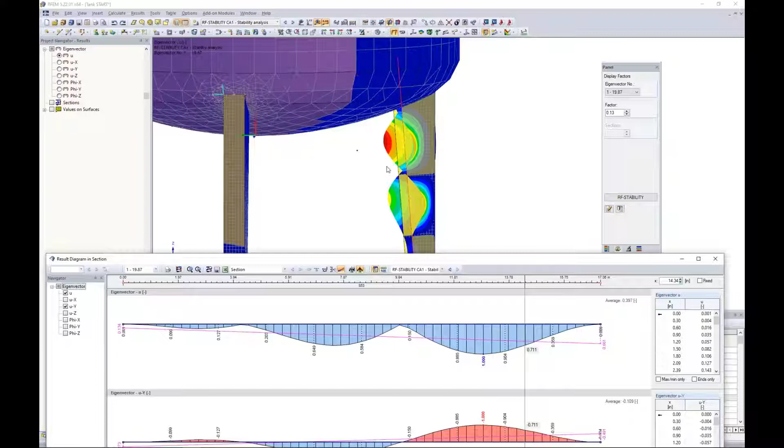So keep in mind that L is not the distance between the start of my surface and the end of my surface, but rather I want to use my working points here where I see my inflection points. So looking at the general buckling view here, I take a look at the first inflection point taking place at about 10 inches, and then I scroll over here to the end at 17 inches. Well, this would be my working point at about 7 inches in total.

So what we want to do here is model the imperfection, keeping these tolerances into consideration. I also want to backtrack and mention that AISC 360 tells us we should really model these imperfections directly. There are other alternative methods such as applying notional loads, but in some way or another they should be accounted for, so we're going to refer to the AISC Code of Standard Practice.

Now that I have my working distance, notice that because RF Stability just runs a general eigenvalue analysis, nothing is given to us in terms of a length. Everything is unitless, so this buckling mode ranges from 0 to 1.0. What I like to do is model this imperfection that can potentially occur and scale it based on L over 500. With my L being 7 inches divided by 500, we want to scale this to 0.014 inches, that's just 7 divided by 500.

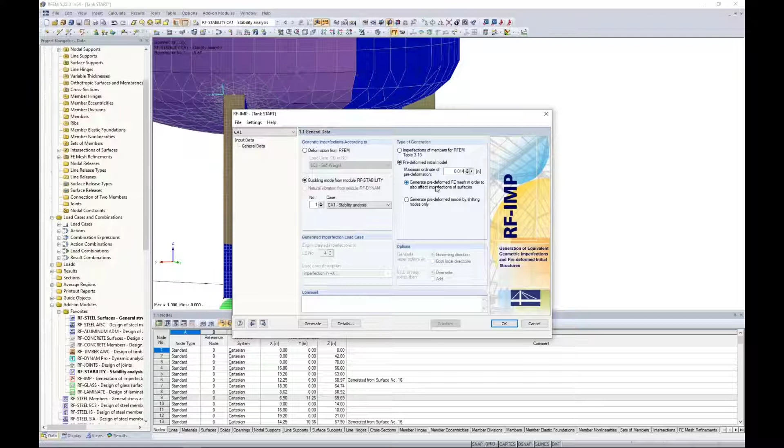This is where I'm going to activate my other add-on module called RF-IMP. RF-IMP is pretty powerful because it allows me to import a buckling mode from RF Stability, so we'll choose our first buckling mode. I'm going to scale this because remember, RF Stability is unitless, so we're scaling to 0.014 inches given to us by the AISC Code of Standard Practice. We can actually generate the pre-deformed FE mesh in order to affect the imperfections of the surfaces. When I click calculate, the program is going to deform the FE mesh based on the scaled buckling mode.

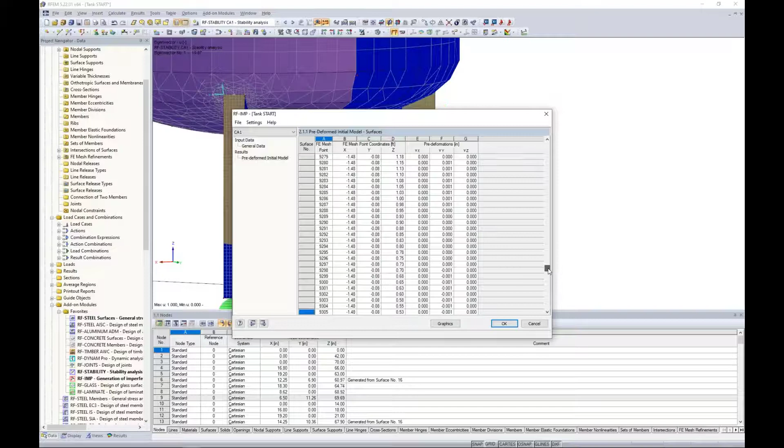Then we'll be able to consider that before we even run the additional load cases such as dead, live, or wind load. So after RF-IMP is done with the calculation, I can see every single FE mesh point listed from my model, and most are set at 0, 0, 0 because nothing's really changed. But we eventually get to a point where some of these values are being modified - you can see the big red arrow. The program's telling me it's going to deform the FE mesh at this location based on the scale of 0.014 inches that you gave it. So now this can be considered as an imperfection and we can directly model it.

Once I'm done with the deformed mesh, I need to go to my load cases and combinations. We visited this dialog box in detail within the first webinar. Under the Load Combinations tab, remember we generated all of our load combinations automatically according to ASCE 7. So I'm going to create my own manual load combination, selecting it from this button in the lower left corner, and replicate load combination 3. I'll call it 1.2 dead plus live plus wind - identical to load combination 3, but I'll take this a step further to apply my imperfection that I just created with that deformed FE mesh. So I move all my load cases to the right hand side to be considered, and change my load factor for dead load to 1.2.

Under the calculation parameters, we have the extra options button. The extra options allows me to activate my deformed mesh from RF-IMP, so that imperfection, the deformed mesh, is now considered with these load cases I've defined. I click OK, and we can run this load combination by starting our results.

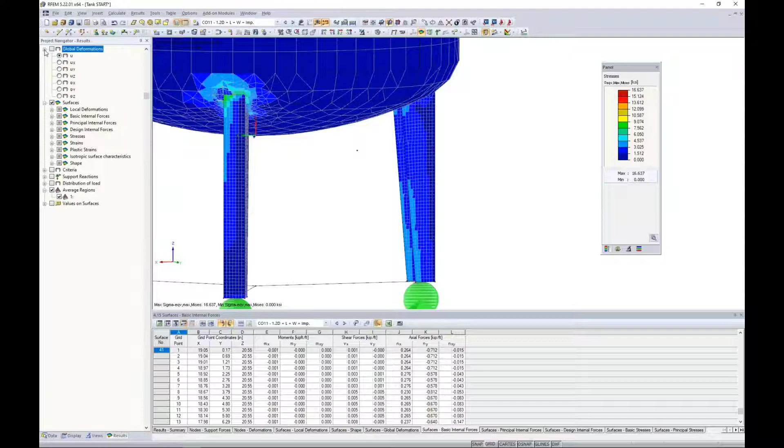But in order to make sure the deformed mesh was applied, I did notice when I turned on my global deformations in the Y direction that we can see this buckling kind of mode shape with the deformed mesh is considered.

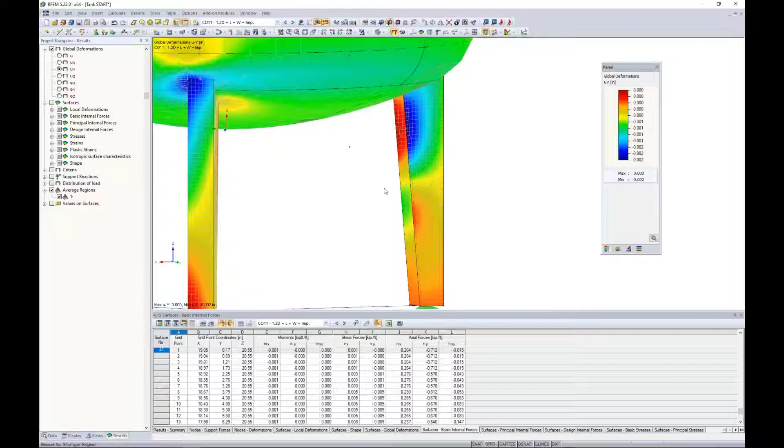We have ever so slightly some deflection here in the Y direction that indicates that the mesh was deformed. Possibly with a third order analysis too, we could even see more of those results available to us. But this in general is just one way that we can directly model these imperfections, because not everything is going to be perfect as we're modeling here.

There will be errors with the manufacturing or installation process. So the final thing I'd like to show you today relates back to RF stability. I said we would touch on a nonlinear analysis for the buckling behavior of the structure. Instead of going back to the add-on module, what I'm going to do is access my load cases and combinations again. Under the calculation parameters, I briefly showed this to you in RF stability for the nonlinear analysis. We actually have all those same options directly within the RFEM program itself under the particular load combination.

So we can incrementally increase a load here until our structure fails. You do need a license of RF stability in order to access this information. The reason why I'm doing it here in the load combination itself is because we have a couple other options that are not available to us within RF stability. So it's slightly more powerful here.

What I'd like to do is create a new load combination, and we'll call this one 1.2 dead plus live plus wind plus our imperfection. Taking it one step further, we will check out this structure until it completely fails with this buckling method. So load combination 12 here is still considering the imperfection, plus we're going to activate the incrementally increased loading.

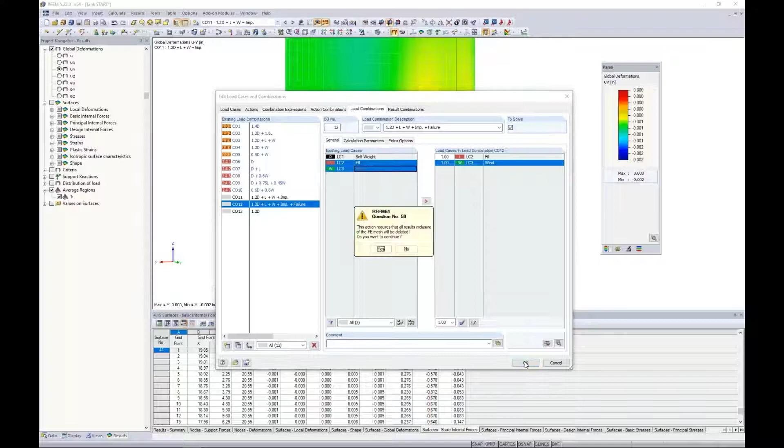And finally, under the General tab, I need to move both the live and the wind load over to the right-hand side. Now notice I did not move the self-weight because we've already accounted for it under the second tab here to use the initial loading so that it's not increased. So once we have defined this load combination completely, I can click OK. The program asks me to clear the results. That's fine, and we would want to run the calculation by clicking on show results for this single load combination.

For the sake of time, I went ahead and did so already, just because it does take a minute to solve. And we will be presented here with our deformation, our results for this particular load combination.

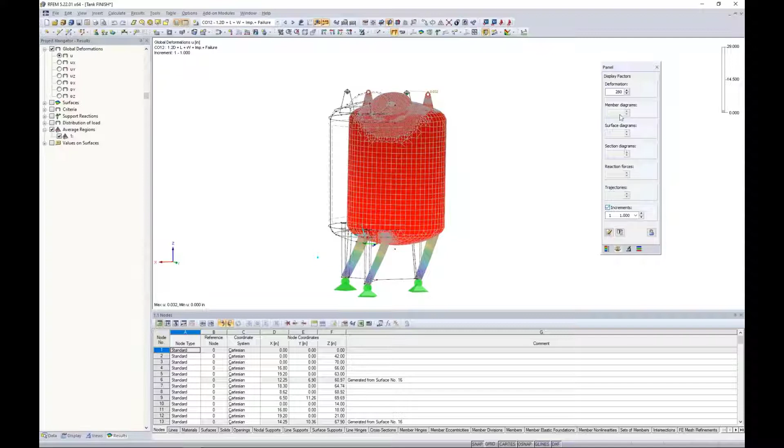What we have the ability to do here is view the different increments. Remember, that was one of the checkboxes I just selected. So maybe I change my deformation factor to 30, so it's not quite so big. We can lock that down here so it doesn't change as I change my increments.

The other thing I'd like to do is, under the Display tab, hide my results and look at the FE mesh settings. It's default to show the FE mesh on the surfaces, but I'm going to change that to the surface results, so as my structure begins to deflect, the FE mesh will also follow. It just makes the view a little easier to see what's going on.

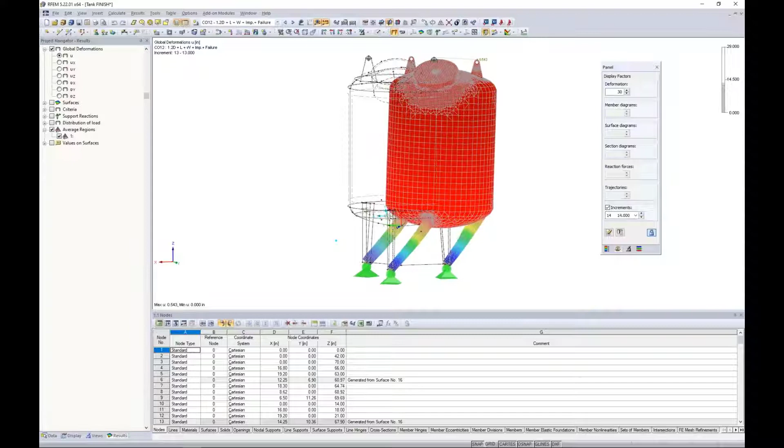So here's my first load increment. 100% of my loads from load combination 12 are applied. But now I can begin to scroll through these different load increments to see the structure deflect under 800%, 900%, 1,000% of the loads. And what will be most apparent is if I zoom in, we can actually see the buckling of that leg element.

I can even take my leg here and highlight it by choosing the visibility by selected objects, so we can really see the source of failure for this particular leg, and we can continue on with the additional load increments.

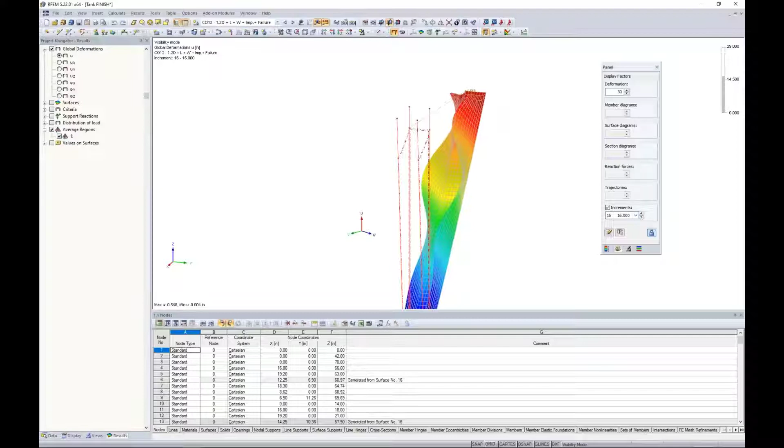Now I can activate the rest of my structure here graphically. So as we're reaching these higher load increments, the structure is still holding on. We're seeing very, very large deformations here. Of course the deformation factor is set at 30, but obviously the leg is a problem until we get to a point that the program says, okay, I can't handle any more.

It's reached 29 load increments and the structure has completely failed. So we might be interested in load increment 28 here, and we can even scale down our factor to 10 just to see the moments right before the structure fails.

Now, these load increments are pretty high, but you can imagine that when dealing with a much more sensitive, existing structure, we want to see how different applied loads can impact the failure mode. This might be a very interesting approach within the program, and then we can determine how we'd want to modify the structure.